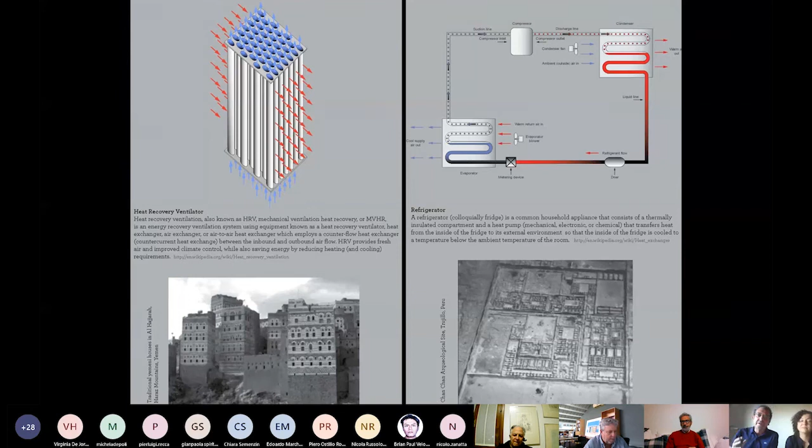Somehow, with modernism, we have lost the knowledge, the talent to understand how architecture can behave thermodynamically, and it has become a kind of plastic or figurative art, while it has always been rooted in very serious thermal considerations. Every single traditional housing, let's say in Sevilla or Naples or Boston or wherever, is based in thermodynamic principles and how to manage the climate resources with more efficiency and the simplest materials. So this idea of thinking architecture, not only, but also thermal hygiene, is quite important for us.

This is something we began to explore, and this will be the first project that we will present. It's very much about relating architecture with landscapes, with different landscapes. Landscapes not understood exclusively as a kind of painting, as a figurative thing, but something that gives you information about the kind of actions that are needed in order to really become efficient. So I will introduce this project, and then we'll give the words to Renata, and we will alternate.

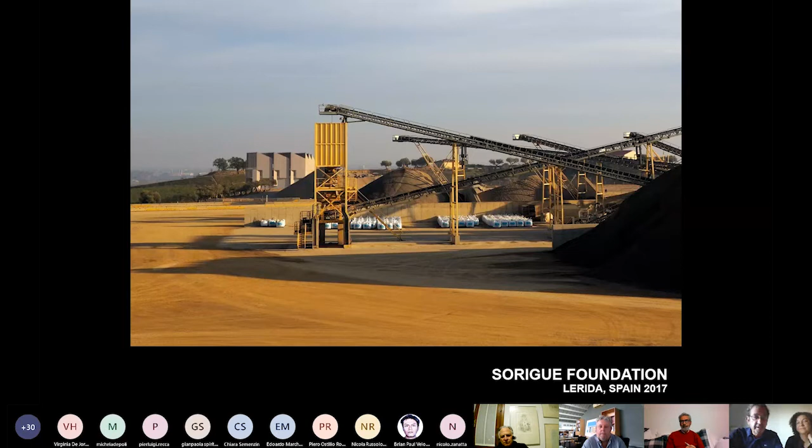I want to begin with this small construction you see below some industrial stuff in a gravel pit in Catalonia. This is the whole area, and the construction is a museum, a gallery of art, a private one, a very sophisticated and very exclusive collection of art. And one of the main things that the client wanted was to root the construction of the museum in the middle of the gravel pit.

For us, it was amazingly important because all the economic benefits that this family had were in debt with the earth, and somehow they wanted us to give a response that really rooted the museum in this place they love, obviously. And the first thing we were trying to understand is why a gravel pit is there in Catalonia.

You have to expand the limits of time, and go to geological times first in order to understand how the tectonic plates were crashing Africa and Europe and creating the Pyrenees, and the river Ebro that is somehow a kind of mark in the whole territory. And how much the ice and water through centuries, millions, 50 million years in fact, have brought all this gravel down to the south, to the flatlands, where the site of this family is placed, the gravel pit is placed.

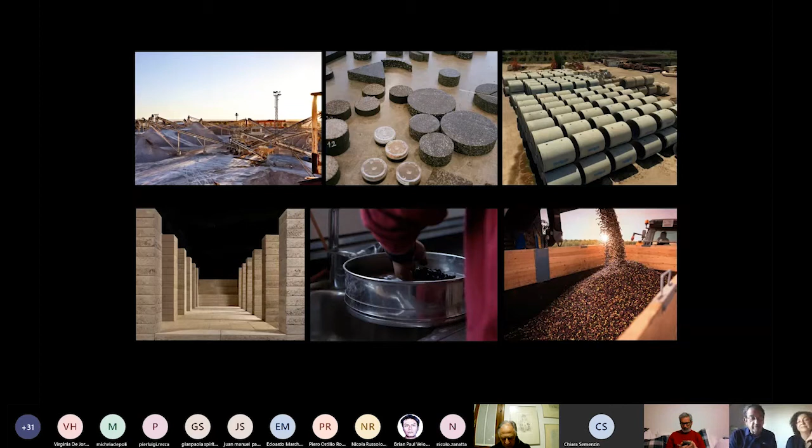This is the olive oil, which is an excellent quality, and in this slide we can see more and more materials. We can see how much they expanded the business to asphalt, to olive oil, to cement factories, etc.

And with the richness they finally gained, they created a wonderful collection of art, very well advised by people like Todolí, who was the director of the Herzog and de Meuron Museum in London.

He recommended them to focus on two topics: the human body and matter. And you can see Antonio Lopez, William Kentridge, Juan Muñoz, who was a friend and colleague of ours, etc.

Once you see the collection they have, we were really moved by the fact that matter and human lives are the two things that we deal with as architects. So somehow we felt close to this collection and all the history of the place, the geological times, the historic times, etc.

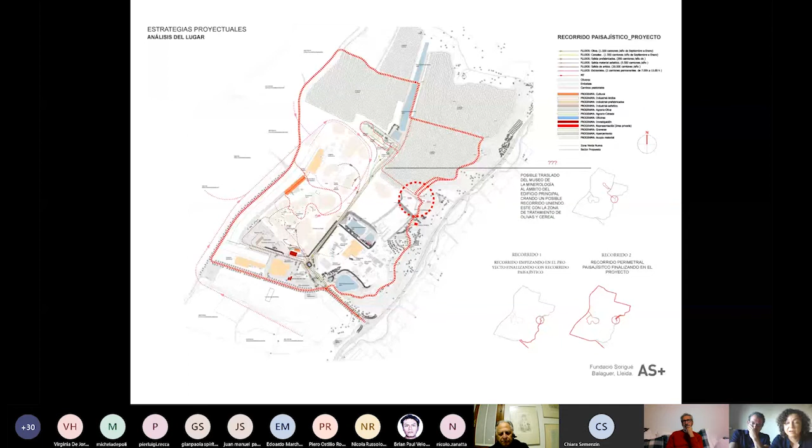To study the site, we draw it with all the needed elements that help us understand the place. The red line marks how we defined the movement of the public, the movement that can give visibility to all these productive processes that Iñaki mentioned before, placed on the gravel. The building of the collection will be one point on this line.

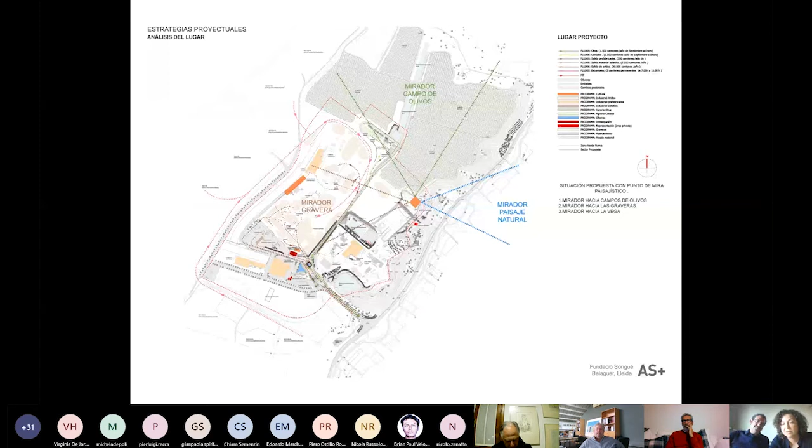This orange rectangle to the right is where we chose a site, a privileged place that gives visibility in different directions to different landscapes: the gravel landscape, the olive oil and olive trees landscape, and also the agricultural landscape of the surrounding territory.

This place has a complicated topography because not long ago part of the earth fell down. So we thought we could use the construction of the building to organize this topographic landscape, but at the same time to get an approach to different places in different directions, as I commented before.

These are the three corners that point in different places: the outside territory of agriculture, the processes inside the gravel pit, and also the agriculture of olive trees. But I would like to go back to explain how we took the decision on the form of the building.

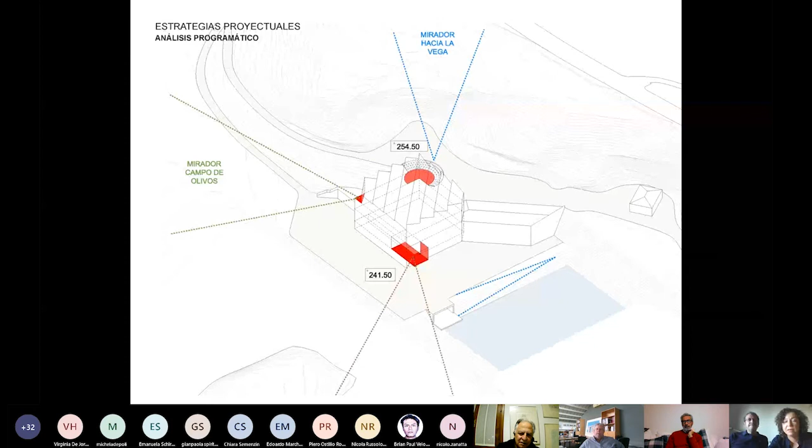When we talk about the building for a collection of art, with a client which is very precise, needing precise conditions as art does, but also for human beings, the other client, we are looking for kind of stability. So the first decision is that the building should be very compact.

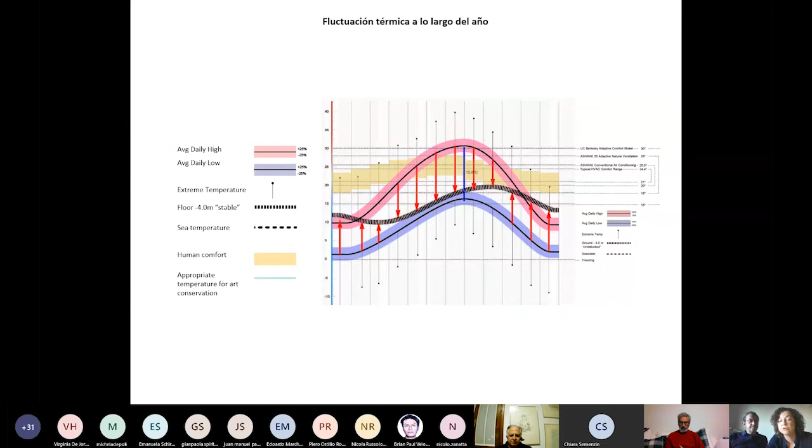We need the form, the volume, that has a minimum exchange with the exterior climate to maintain temperature stability. On this scheme, also important is the black line that defines the temperature of the ground, 4 meters below the level, but it's much more stable. So a compact volume and relation with the ground was the first conclusion that gave beginning to the project.

And these are the first sketches. You see, it's just a cube, which is anchored into the hill.

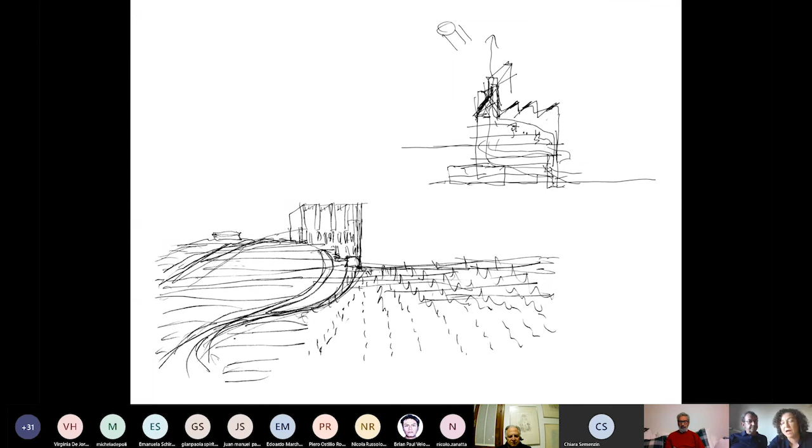The second step, what we start to work with, is natural light. We know that for the collection we want natural light, but we cannot have direct radiation of the sun. So we make this deformation of the roof to close off from the sun and open to the north. To get maximum light, we also turn this square 45 degrees.

And we take this deformation from the roof to the facades, so the whole building naturally opens to the north to capture natural light and protect from sun radiation. This is the volume that was defined through these decisions I mentioned before.

At this moment, we start to work with our collaborators, the engineers, who could give us more precise data about how the building is working with the climate. What was another decision to take?

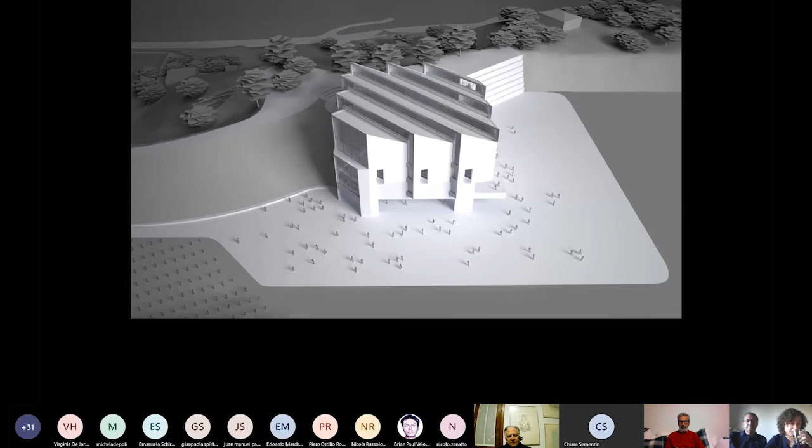It's explained in this scheme. So to get the stability of the building, we need a thermal mass, but not so much on the facade. We need this thermal mass that can give stability to the building, but much more like an inner skeleton of the building. So what you see here is a decision that everything is constructed through concrete - the slabs, the walls - it's a continuous element that maintains the stability of temperature through the year.

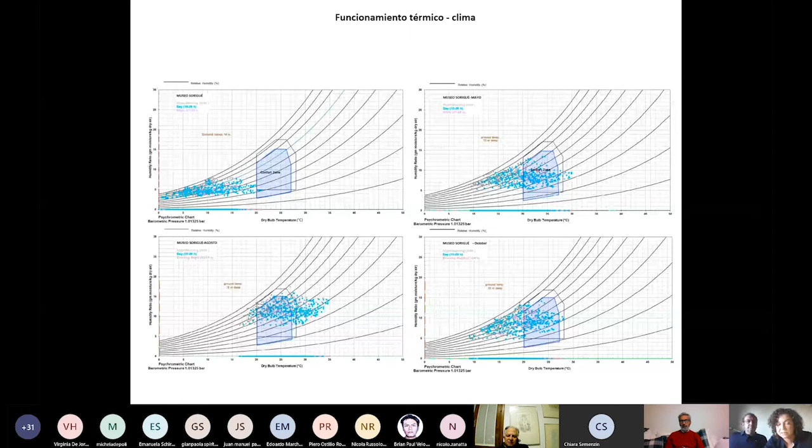This is the next step. This is a climate which is a result of our first architectural decision. So just through the form and through the materiality, through the matter of thermal mass, we get stability. You see that the points start to get more near, which means the climate is more stable. And in spring and autumn we are inside human comfort. We still have some problem in winter and summer.

So we need to add some decisions to condition this thermal mass. So we defined that all of this concrete will be perforated. We create a kind of porosity, and through this porosity, we push the air.

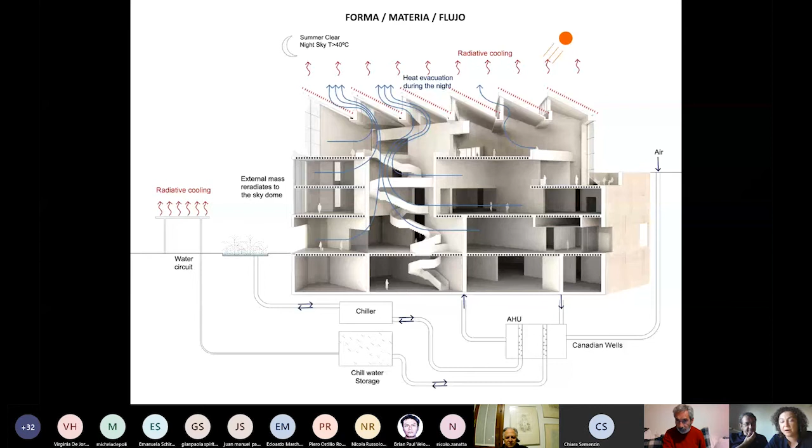So the air is taken from the outside, it goes to the underground, taking the temperature of around 14 degrees of the underground - not exactly 14, but in summer it gets below exterior temperature, and in winter it gets hotter or cooler, giving a more comfortable temperature, and the air gets to these porosities.

And through just this decision, we get comfort in summer, because we can get to 17 to 20 degrees, which is inside human comfort. In winter it's more complicated because the temperature of the underground is 14 degrees, so we cannot go higher. But at this moment we could say that just with the form, the matter, and the movement of the air, this building can work for the art.

The client, which is an art collection, and also for the humans along the tour. And maybe in winter you need to wear a light coat or jersey, just because you will be around 15 degrees.

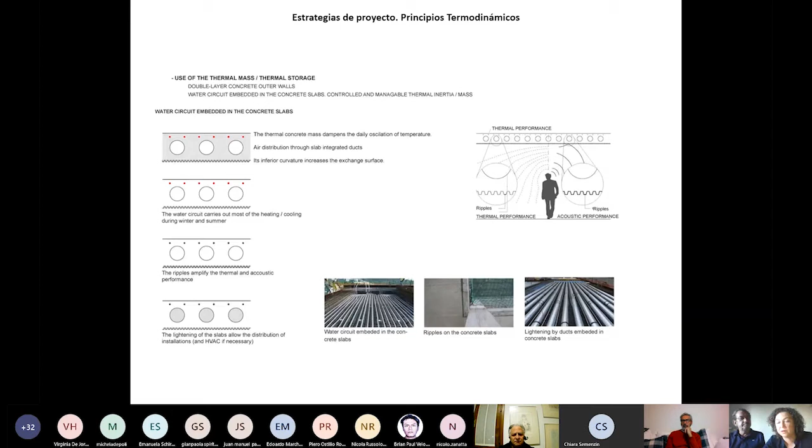If we would like to go to perfect comfort, we can add another porosity inside the concrete, which is water, this time as a radiant floor to heat the human body. And this is how this construction would work.

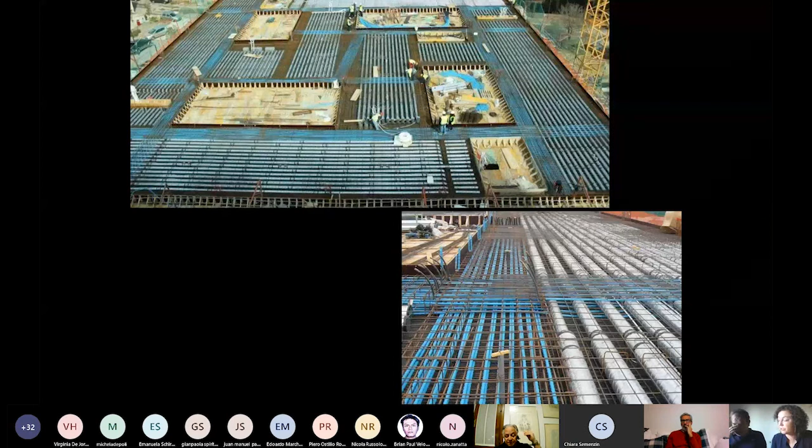It's a lot of tubes in different directions, but it's complicated to make. But once we put the concrete, the building is finished, let's say. It's one material building - we don't have any finishings, concrete floor, walls, and ceiling.

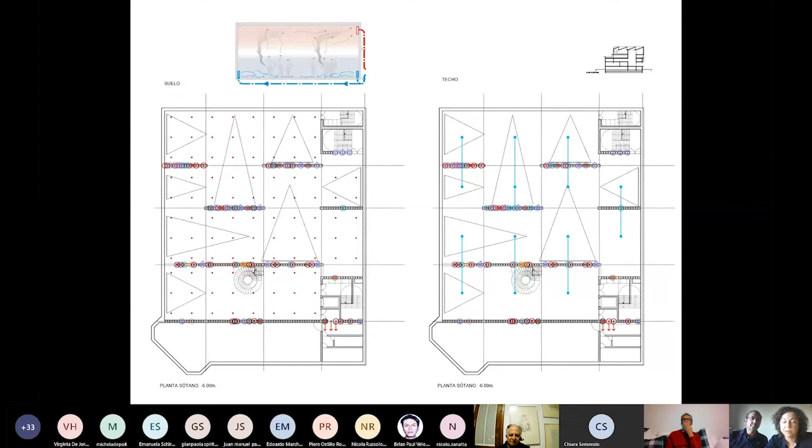Sections and floor plans - you see that this porosity in the slabs repeats in the walls. The building is very simple, it's just concrete construction. I will not get deeper, but you could see how different walls are conditioned, perforated, conditioned on the interior.

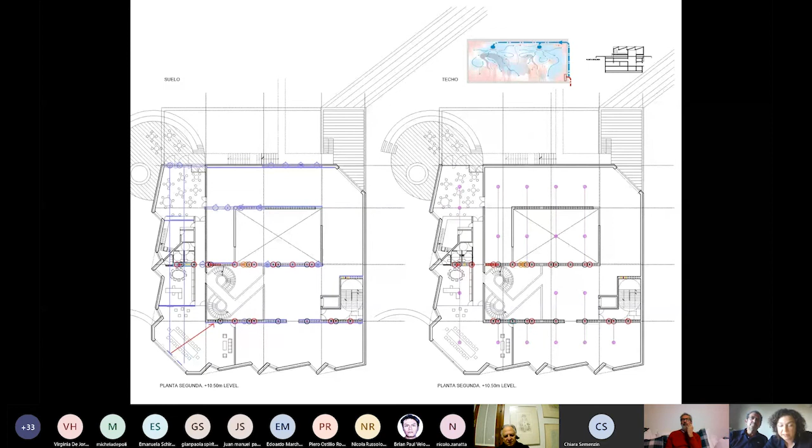Now getting to the last floor, it's different. It's for events, it's when more public could appear, and when this added ventilation in the roof can help to condition the temperature, the interior balance. And each of these floors, each of these exhibitions, is completed with observatories, lookout points that become part of the tour for the art collection.

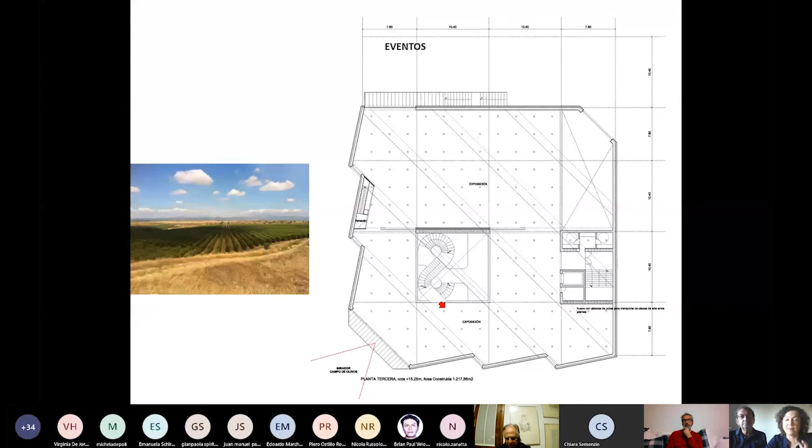So on the events floor, the last floor, there's a viewpoint open to the north with an olive tree landscape and this big opening. We have the view to the west, to the agricultural landscape of the surrounding territory, and the viewpoint or observatory of the gravel.

On the entrance floor, a ground floor with temporal exhibitions, auditorium, and the underground. This is the box completely protected below the earth, for video arts.

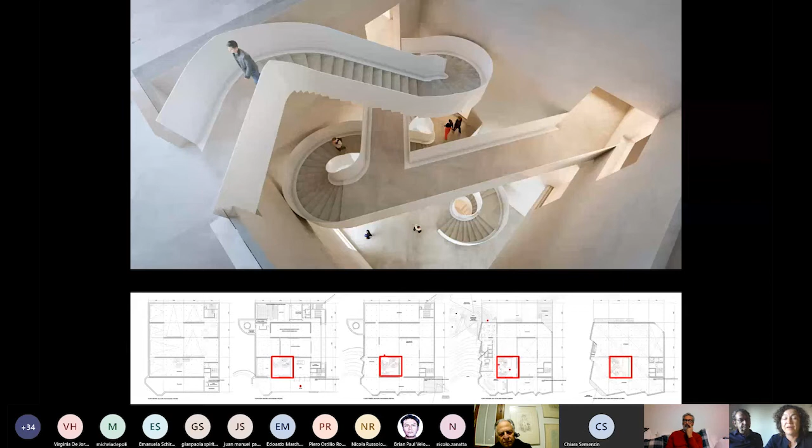And all these floors you see, in the sequence down the image, are crossed through the void, a vertical void, that organizes the flow of people, the movement and connection between different floors, but also the flow of air. So this void is for buoyancy, taking all the hot air up to the roof, and during the night you open the windows and ventilate it, restarting for the next day.

And to finish, this last image is for us somehow the image that is out of time, that can be understood as a thermal machine. It's at the same time a museum, at the same time an observatory, and it's embedded, forming part of the landscape, like the concrete. It's produced on site, with the color of the air or earth or the ground surrounding it.

As to Iñaki, if you want to add something. No, we like it. We like this project.

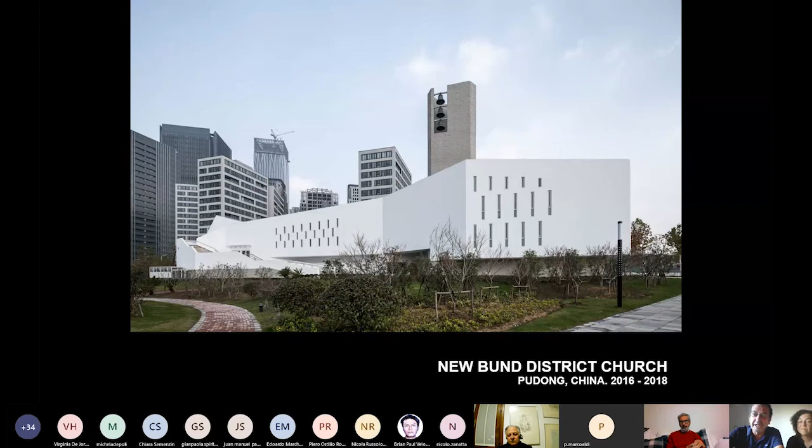This thin form of the church is forced by the fact that there's an underground, a serpentine that runs around, and you can see it almost touching the longest side of the church. It forced us to use just this very small corner of a park that had a river and finally a lake, a small river connected to the Huangpu River, a huge, wonderful, beautiful river that crisscrosses Shanghai.

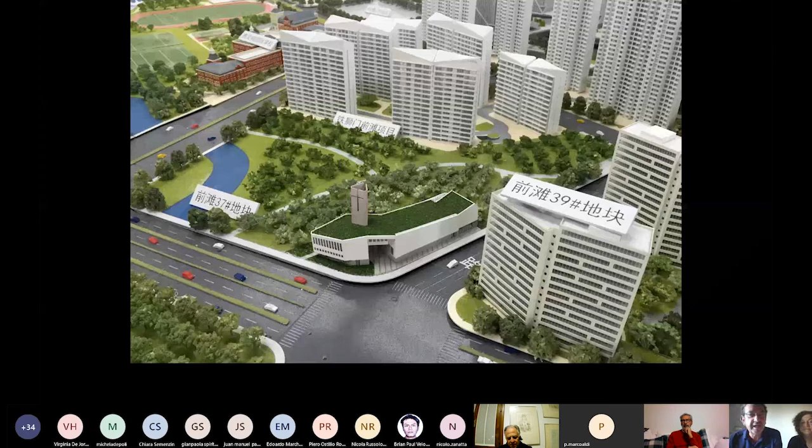And here you see what was finally made. The small spring, the small river, was transformed into a lake, much more interesting and beautiful. And we occupy the corner of one of the main entrances to the neighborhood.

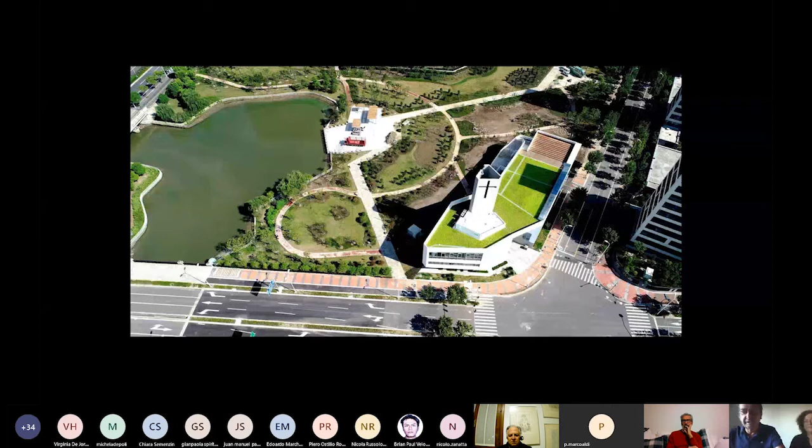Somehow they decided this was an interesting site, because everyone coming to decide if they were going to stay with their businesses in Shanghai would see there's a Protestant or Catholic church—finally it's ecumenic, welcoming everyone. So this is the reality built.

One of the things we did was change and manipulate the original design, which was really ugly, I have to say, and we divided it into two buildings: the bureaucratic, administrative part, and the religious part.

We decided that somehow we had to maintain the scheme, but create an entrance to the park and to the church at the same time, as you can see in this image and in the plan. And we began to think about the kind of church it should be, because it had to be ecumenic.

So we wanted to make it longitudinal, as in the tradition of Catholic churches, but at the same time we had to deal with other kinds of Protestant and many other Christian churches that sing and interact with the auditorium in a more theatrical way, with everyone singing. So it had to be a kind of interface between the traditional longitudinal one-room layout and something more articulated, pivoting around the director of the whole scenography.

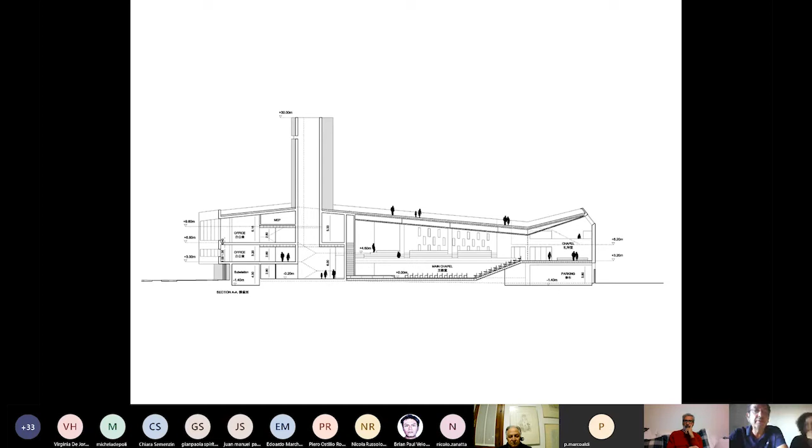And then the roof, which was key for us, connects the church to the park, to really make this church part of the public space. And the tower is just a ventilation tower, it's just a void.

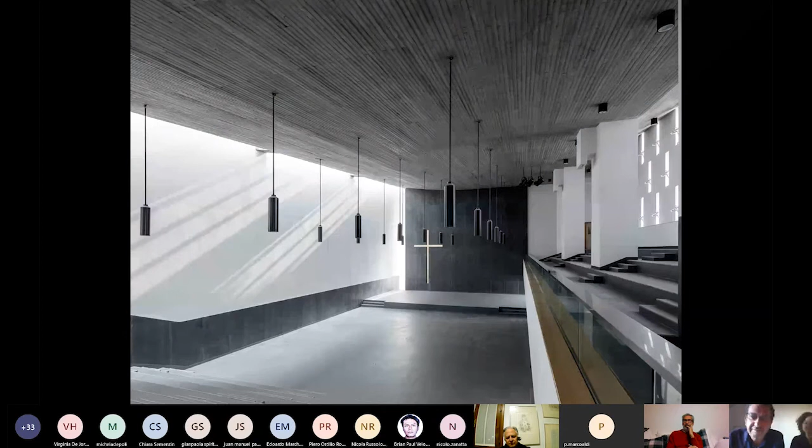And here you see what I was trying to explain first: the fact that it's like half of an auditorium, but it's also longitudinal. And the whole roof is the best concrete made at work, so it's very well finished, to be honest - it doesn't need too much explanation.

So these are the elements we can control, and the rest is out of our control. In fact, the church is still not in use because the neighbors have not arrived yet. So the whole neighborhood will be put at work at once, and the preacher will come at the same time as the new neighbors. Well, so the furniture is still waiting for the neighbors.

And the cross couldn't be any other palette than red, which is like the Red Cross and it's strange, or golden. So we decided to go for golden. They have this kind of strange specifications.

So here to the west, we have all the ventilation - it performs through the lighting systems. Now you see to the east, the sun comes like this; to the west it comes horizontal. There's a kind of ritualistic use of light that I don't want to go too deep into, but coming from Catholic countries, we know a little bit about all these things, and it's not difficult to manage them as an interesting resource for architectural control.

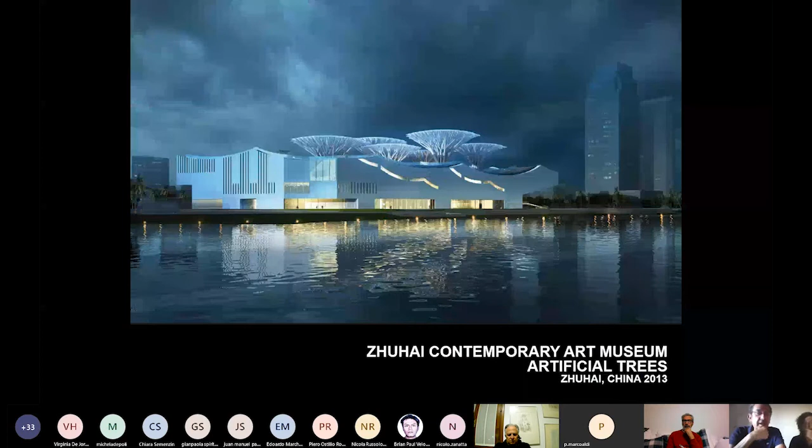This one is quite connected, I have to say, with the third one, and this is why instead of three cases we want to bring four, because this one is again in China, in the south, in Zhuhai, very close to Macau, on the sea front. It has again terraces and wide surfaces, and many of the patterns we were unconsciously using in both moments without realizing how closely they could be related, with the stairs coming up, etc. But I give the word to Renata for this.

And from this point is where the bridge is coming. Probably you heard in the news a couple of years ago, I think it's the biggest, the longest bridge in the world, 60 kilometers long, that connects Hong Kong, China, Zhuhai, and Macau, these three countries, we could say. So the site is amazing.

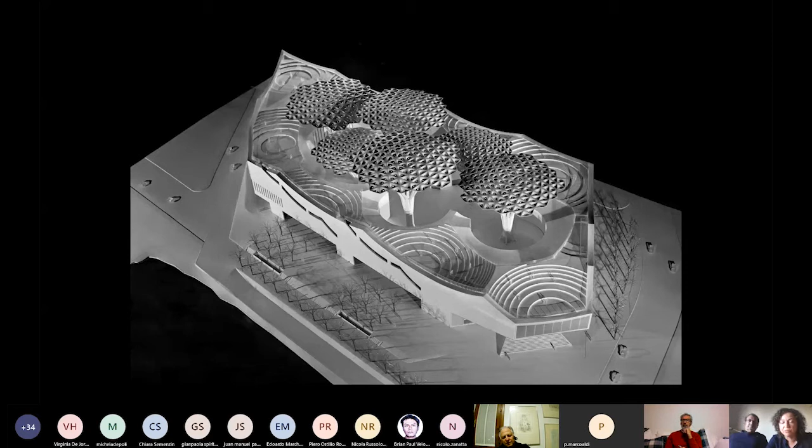As Iñaki commented, I want to focus on the iconic elements, the most important elements of the project, which are much more the exterior spaces than the building itself. Knowing this site from the beginning, we thought it shouldn't be a museum that is completely closed, a white box, but one that can get out, that can have these public spaces. This museum can be an observatory of these incredible surroundings and different landscapes.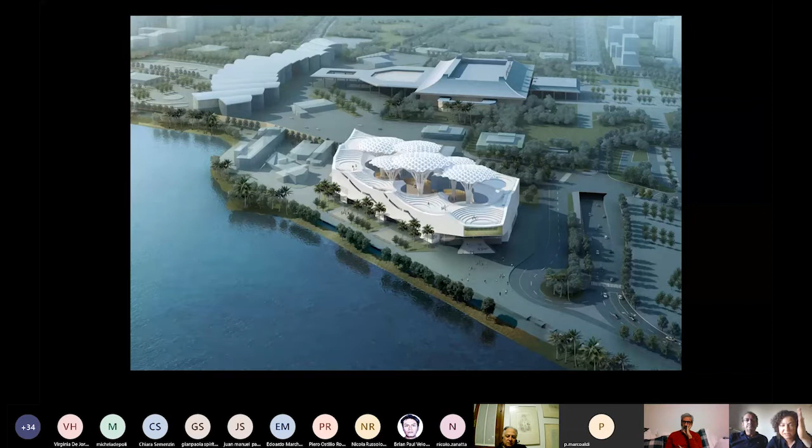At the beginning we thought this would be much more of a problem, but lately we decided, okay, once we have this concrete mass, why not take it up over the floor, continuing the structure and continuing the concrete. So from this moment the project starts much more like cutting from the existing volume.

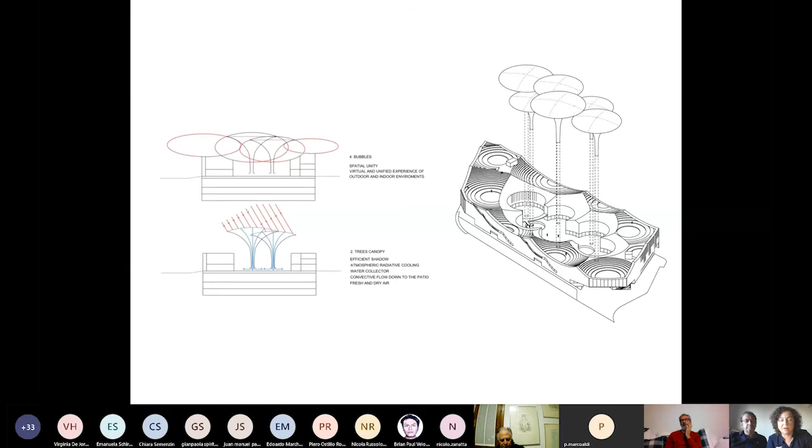Here you see these first ideas, how the canopy creates these kinds of bubbles that create the units, the spaces that unify the form of a tree, of a canopy, and the form of the amphitheater. That's visible in this sketch.

When we start to think about these canopies, we find this example of a tree, the prehistoric dragon tree, which is very different from other trees because it doesn't drink water from underground through the roots, but takes water through the dew, through the air, through the humidity in the air, from the top of the canopy.

This humidity is distributed through the branches of the tree, so it has a very precise geometry because of this. It works like a kind of machine for the exchange of water.

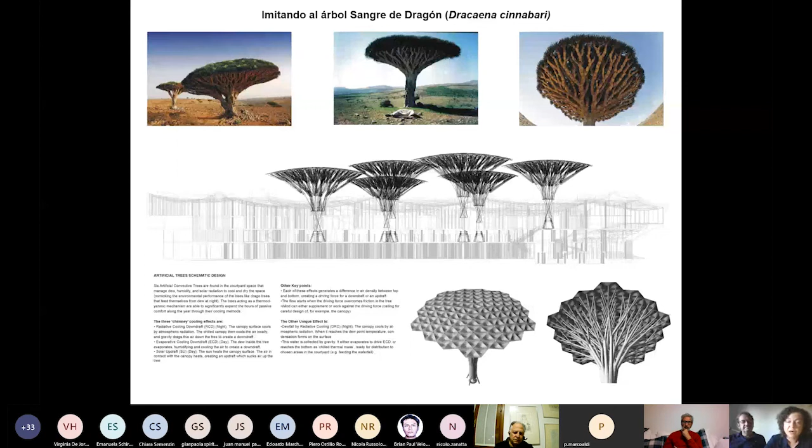When we define this tree, we think: if we protect from the water we can collect it, and if we protect from sun radiation with this sophisticated collection of voids, maybe we can work not only with the movement of water but also the flow of air. At this moment we start to work with Salmaan Craig to define this possibility.

Here you have a description of how this machine would work. This is a cycle of 24 hours, with air going down and air going up, closing the circle in 24 hours.

How it works: in the morning, in the upper part of the canopy the air is colder, but with the first sun, the dew in the air starts to transform into water. The humidity in the air changes state to water. This needs energy, so the air gets colder.

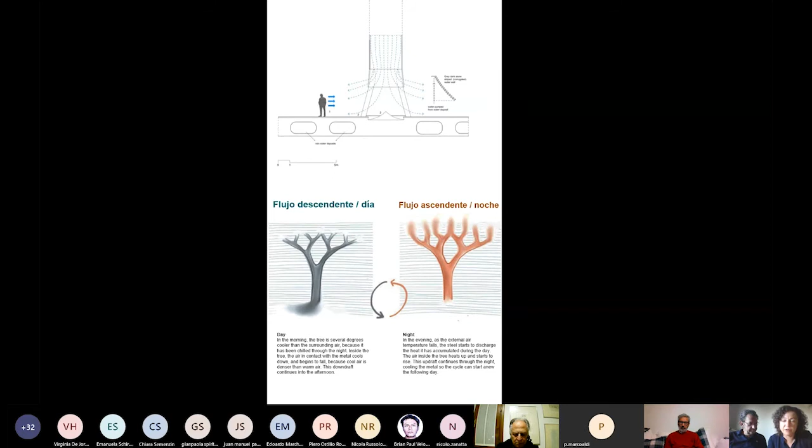This cold air goes down through all these tubes, down to the courtyard. Throughout the morning the cold air goes down, but during the day the mass of the trees gets hotter and hotter. In the afternoon there's a moment when the flow changes: the cold air stops going down, and the hot air from the courtyard goes up instead. So these trees are a kind of heat exchanger.

So the form, as I explained, is very sophisticated—we need the flow of the air. It's all precisely defined, from one branch to 180 branches in the upper part, always with the same surface in each section to make this flow smooth.

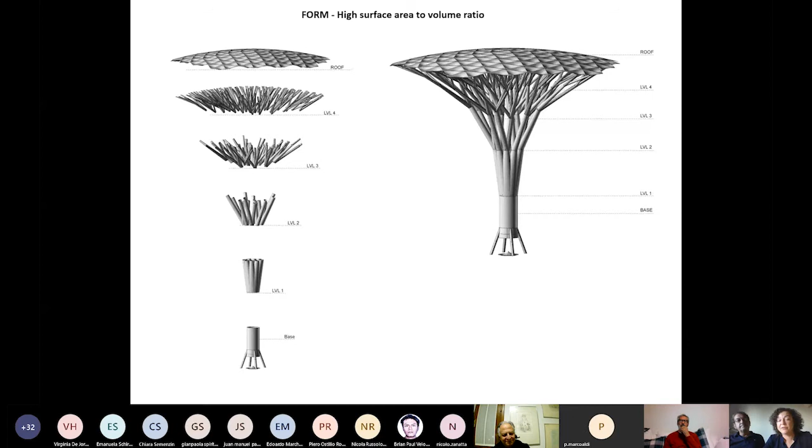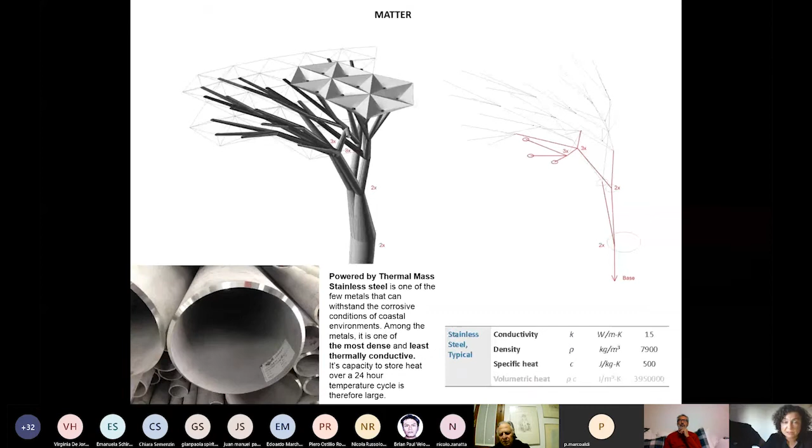It's a kind of thermal machine because it has a very high surface-area-to-volume ratio, so it works like a thermal exchanger machine. For the material, we designed it in stainless steel, which has the best characteristics as thermal mass, and it also reflects the sun.

And these are kind of the geometry—how the tree is constructed through 5 pieces.

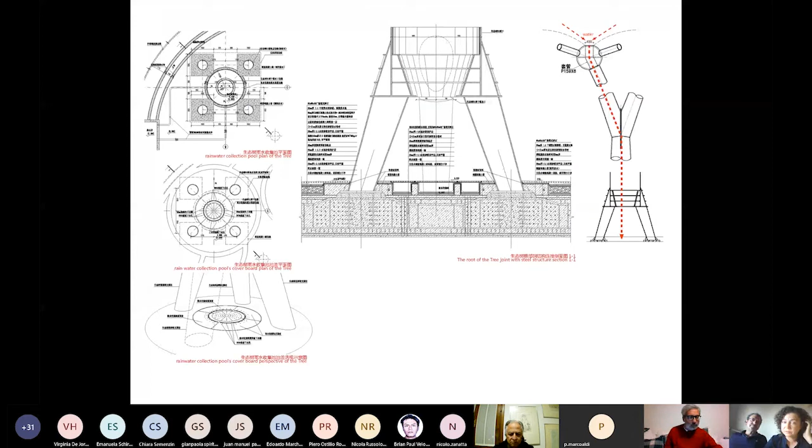All this canopy is collecting the water, but it's going down to the deposit underground. These are construction drawings already. Here you can see the section of the building, the inner space with 6 dragon trees, the canopies, and the exhibition ring that is surrounding this place.

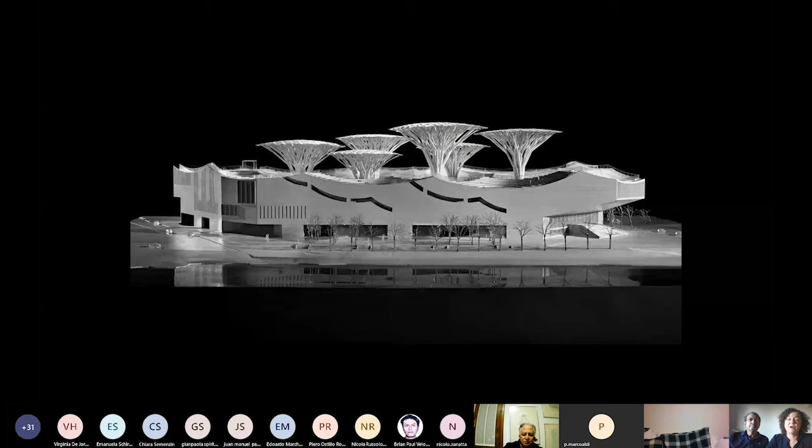And bringing back the idea of the observatory, the roof space with the amphitheater, the courtyard with canopies, and the last image, which is a facade of the museum. These trees give the iconic character, and this is the first image you see when you come through the bridge from Hong Kong.

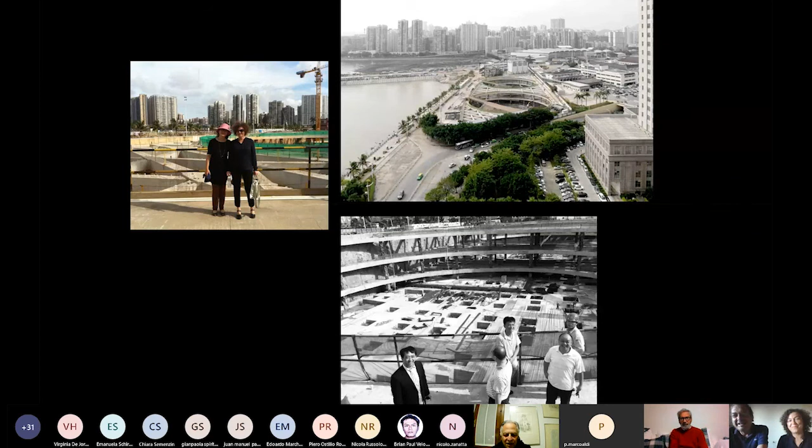Here is Renata with one of the leaders of the construction company at the construction site. We are waiting for the second step now. The last one is finished.

This is an intermodal station and a park in Logroño, in La Rioja, the place where one of the best wines of Spain is produced. La Rioja is well known all over the world. This was the product of an international competition we won, and it has taken us 16 years to finish. It's a slow process, you have to be patient and deal with many different facts.

Five mayors of Logroño, the city where the intermodal station is located. It's a small city, 180,000 people. The river Ebro, the biggest river in Spain, very important—it's the same river you saw in the first slides when we were showing the gravel pit. And the city was cut in the south by this huge train station for passengers, for goods, local trains, national trains. It was a barrier that socially changed the city completely from north to south, so it had a lot of problems.

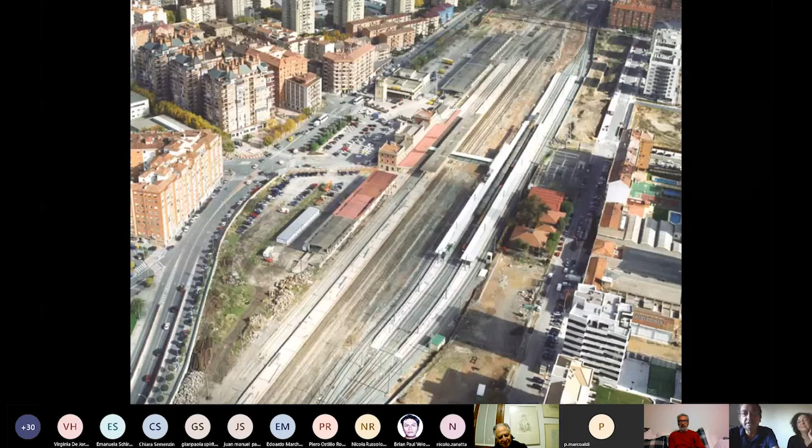Once it became sunken into the ground, the whole thing was transformed by us into this. This is the first part, the train station. We have finished also the bus station, I will explain it now. And what was previously a kind of barrier has become a place that unifies north and south and creates a center, a new center in the south.

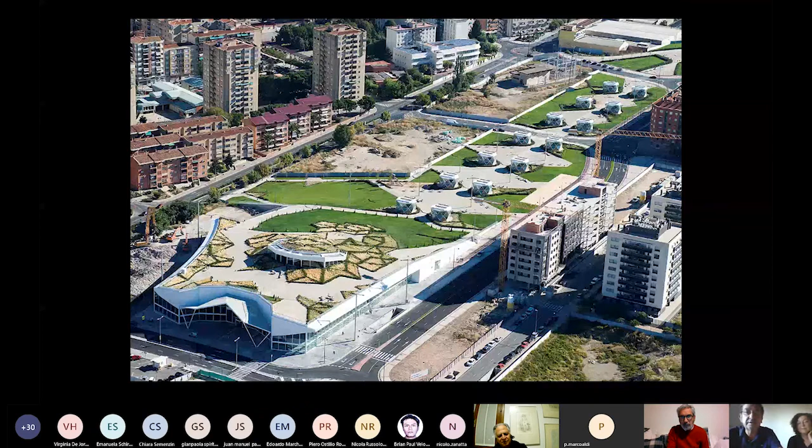What was a kind of wall separating north and south has become a ring of green spaces that reconnect the whole city and give a lot of new spaces for bikes, joggers, etc. So the whole idea of the project is based on this. It's social, but it's also landscape, and at the same time it's infrastructural.

I think it was needed to show this project because it completes quite well our approach to entropic or productive landscapes. Logroño is in a key point touristically, in a key point of high-speed trains, very close to the Basque Country, to Bilbao, to Catalunya, Barcelona, to Madrid—1 hour and a bit more from Barcelona by high-speed train. So for weekends it's a wonderful plan, and it's a beautiful region. The whole idea, La Rioja, is incredibly nice.

But this is the model that we presented to the competition. And the reason why we won it—as you can see, there is no train station, no iconic shape for any kind, it's just a slope. It's a smooth slope in continuity with the green corridor, and some towers and some slabs that reconnect the whole void with the north-south areas already constructed.

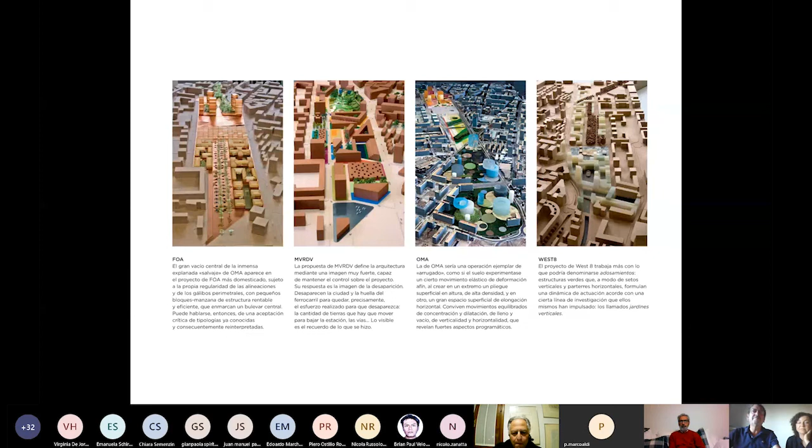We were fighting against Rotterdam, as we always say, because it was Foreign Office, when Alejandro was the director of the Berlage Institute, MVRDV, OMA, and West 8. So it was the whole pack of Rotterdam's best architects fighting against us. But if you see their models and compare them with ours, theirs are full of, let's say, 19th century blocks or things like that—it's a kind of mess—and ours is about public space, about landscape, about connecting the idea of movement with the idea of not only trains, but also human bodies.

This is another view of ours, and these are the 3 boards—the 3 boards of the competition. I always bring them to show why we won this. First, the first one was a study of the changes at the urban scale.

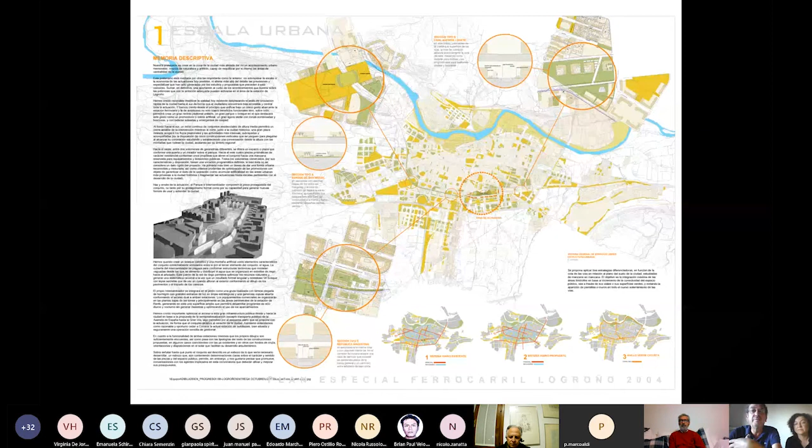It's a small city, but it has a lot of potential, and it's growing now—even now, it's growing, which is almost a miracle. Once you could identify the key points where the connectivity could be reshaped, the whole idea of making a park or creating a kind of green belt captured the imagination of the people of the city, and it was amazingly attractive.

This is the main drawing of the stations. You don't see any station, you just see green stuff—just some turrets and green parks. And this is, I mean, this is the main reason why we won.

We were selecting the idea of a green surface, you see water ponds, just because of the river Ebro so close to the city. The whole city is one of the few, if not the only one in Spain, that has a lot of subterranean channels of water. The drainage surface of the whole city allows you to work with green stuff very easily.

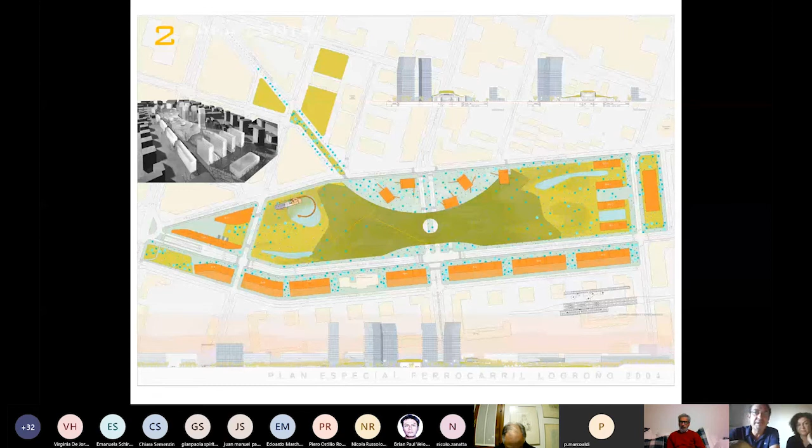It's one of the few cities that stays completely green along all the seasons of the year in Spain. So we said we can really do something that is easy to maintain and productive in terms of reactivation of the whole sector.

Here you see the U shape of the bus station to the right, the train station to the left, and the small towers, 60 meters or so, looking at the topography and the flatness of the city.

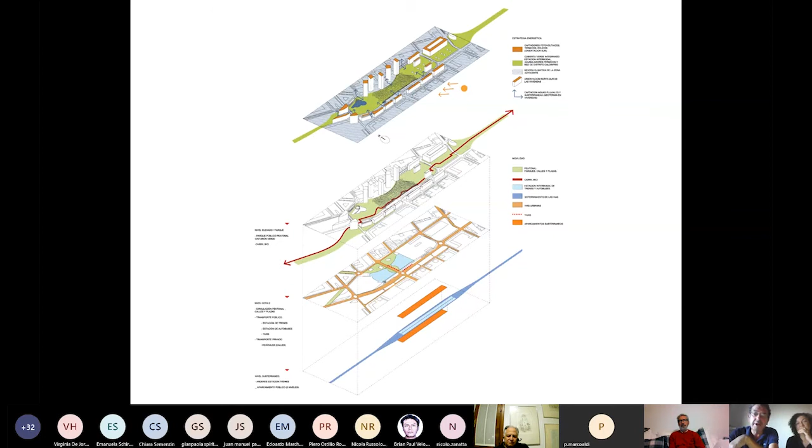This is a scheme that explains the many layers that we had to deal with—many infrastructural layers, parking layers, let's say a subterranean car park, etc.

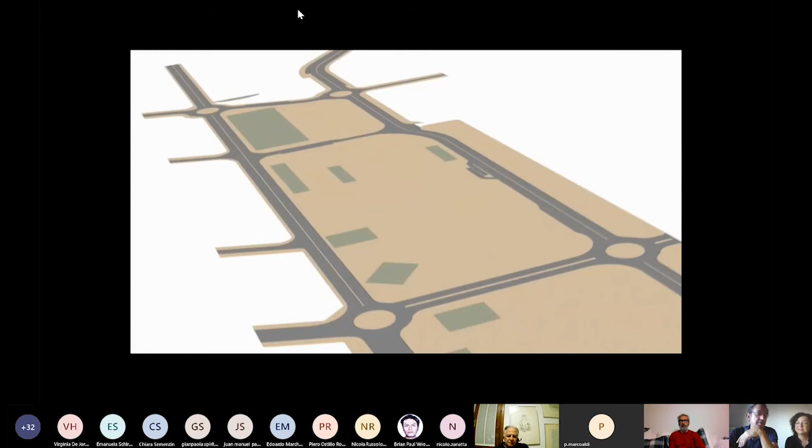I don't think we're interested in this one because it's very slow—it's the steps, how to build this. It was about how to build this step by step without disconnecting one part of the city from the other. It's more about engineering the process of construction.

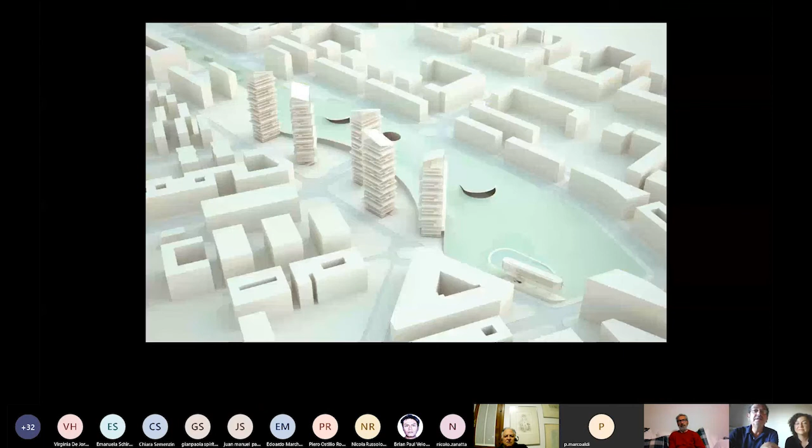This is the final image of the park and the five towers, the final image of the towers, and the transformation of the drawing for the competition into a drawing inside the city. These are the images of both stations and the five towers.

The towers are terraced and also very green looking, like balconies that are rotating and have photovoltaic solar collectors that capture energy for the maintenance and lighting of the park at night, and also for hot water for the residents.

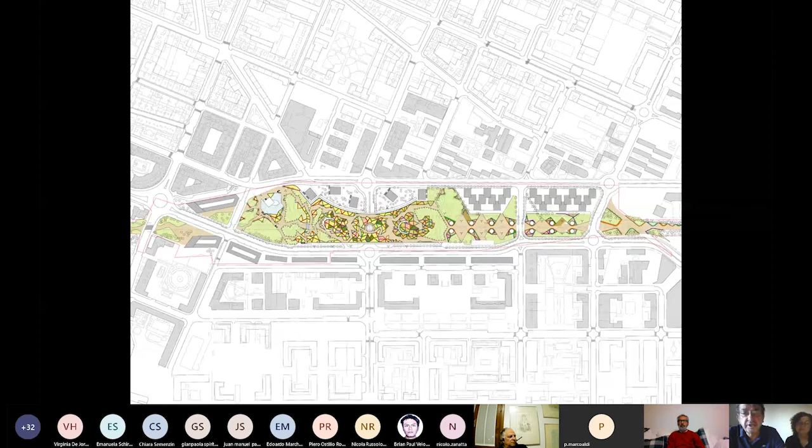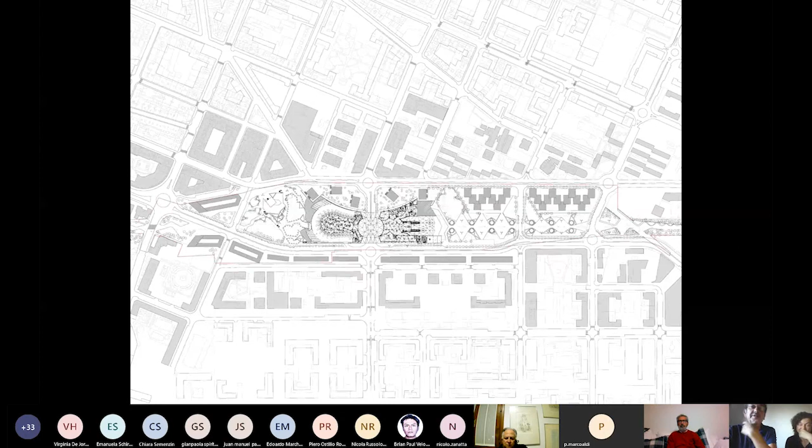Here you can begin to see how much the patterns become more triangular, and how in the final decision, because of some technical issues, we changed it—to the left is the bus station, to the right is the train station. That's the only change, and these are the final real sections of the whole thing.

So the triangular shape comes from the fact that we needed to construct within a low budget. I have to say that a very famous Pritzker Prize architect had the exact same commission for another city in Spain, the city where the president of the government was born in those days.

It couldn't be made because when they tested the schematic design, it was 10 times more expensive than their budget. Ours, including the park, was almost within budget. So this was an important difference.

The triangular shape allowed us, instead of going to a huge span like the conventional 19th century station, to go with columns and create this kind of grotto cavern shape instead of a 19th century industrial crystal palace or whatever.

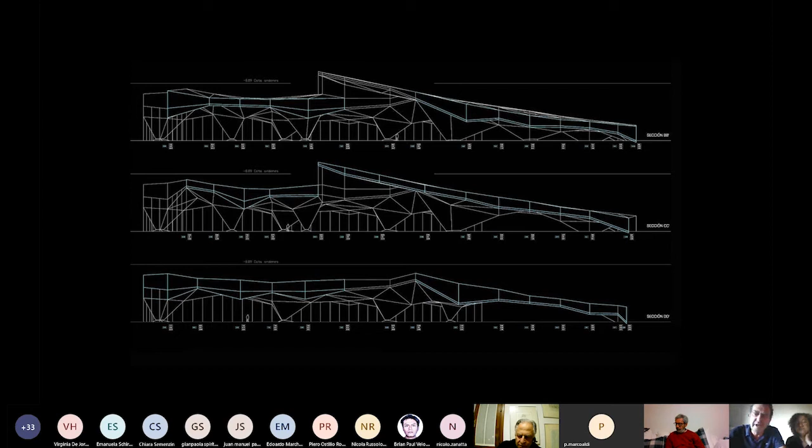These drawings are politically very important because they show the contrast between us as architects and the companies, where the limits for them and us were traced. So from this line out was our field of authority, and inside was their field of authority. It worked quite well along the whole process.

You see the columns—they're trying to solve the complex problems in the basement, which has a lot of stuff. So we went with never more than 20 meters of span, which made it easy to manage.

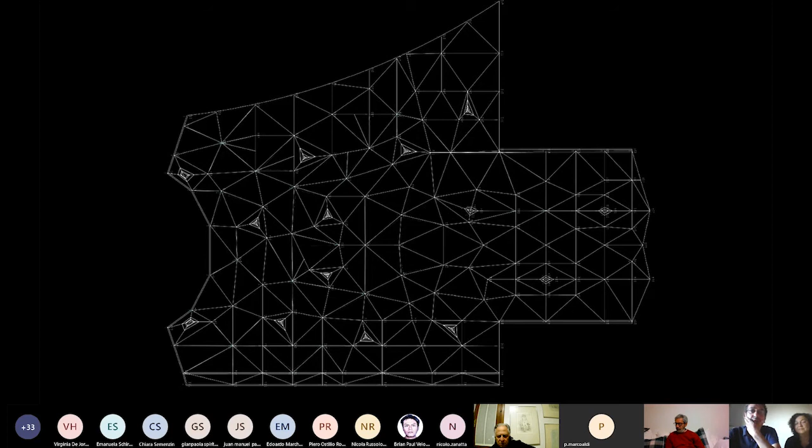You go down to the tracks that are sunken, and you see some skylights. This is the structure. The structure is very simple.

We were not interested in trying to become amazingly interesting in structural terms. What we wanted was to make it simple and create all the effects we wanted without spending lots of money. So you see the column on the left side, and all the surface maintained at this column.

But if you compare all these geometries, the roof is completely regular. It's very simple, the most conventional slab you can have, and it has this kind of shapes just because the materials can adapt their geometry. It's regular, and the forces go from one side to the other, and the whole thing is built.

Up there, the triangular shapes become the parterres of the new park. When you go up to the upper parts of the park, the triangular shapes are transferred from inside to outside. With Teresa Galí, the well-known Spanish Catalan landscaper, we were dealing with this kind of geometrical patterns everywhere.

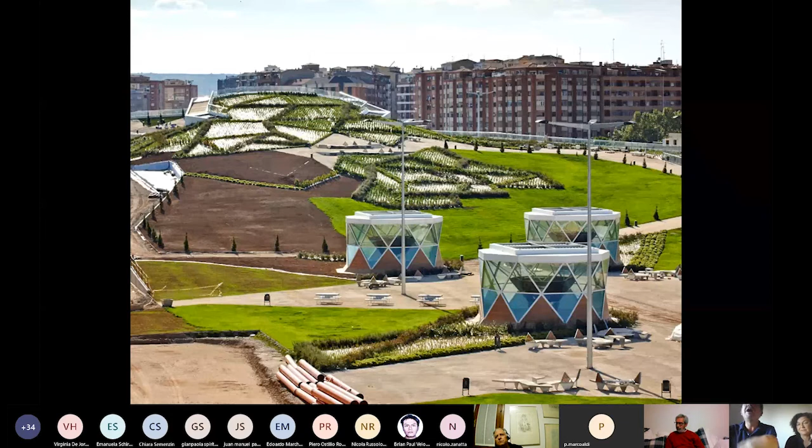Inside, with artificial materials, with extruded aluminum shutters that are commercial products, very simple and efficient, recycled aluminum, and outside this kind of geometries adapted to natural materials. This is the entrance, the station, and this is the upper part.

The upper part has mostly sand with cement and different bushes, etc., and inside you have these skylights that you can see through some of these aluminum shutters.

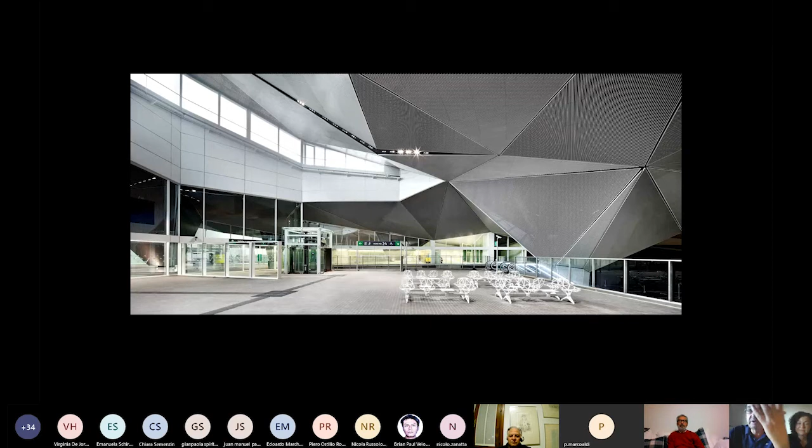While you move in a station, you always move longitudinally, mainly from the door to the train track and vice versa. So all these facets of our triangular shapes, in one moment, become translucent, transparent, and show completely the interior. You will see it later.

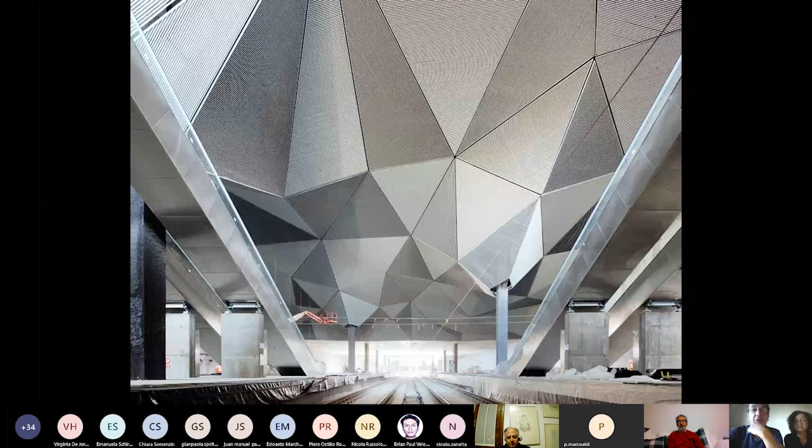This is the way you go down, which is very normal. And then you have the skylights that give light to the park at night, and also during the day to the areas where people wait for the trains.

Up and down, this kind of geometry creates a completely new way to look at the city. A lot of people are visiting, and Instagram is full of portraits of people rediscovering the relationship of the city with its surroundings, the mountains, and the more interesting natural motifs of the surroundings.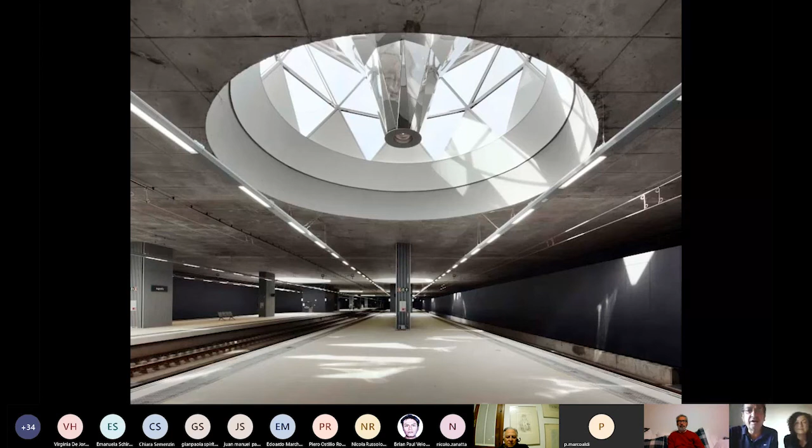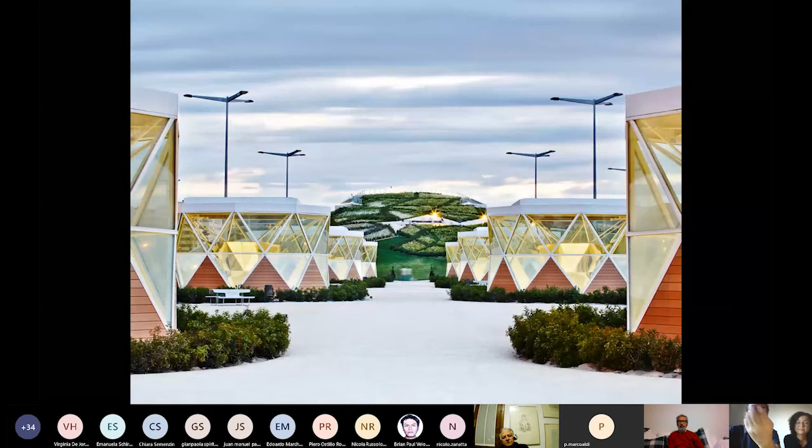The skylights have this kind of kaleidoscopic way of projecting the natural light inside and expanding it, so you can really enjoy an interesting space, and outside it creates a kind of parade of monster skylights.

For us, it was a very key element to really control the budget and at the same time be able to create the effects that we wanted to create.

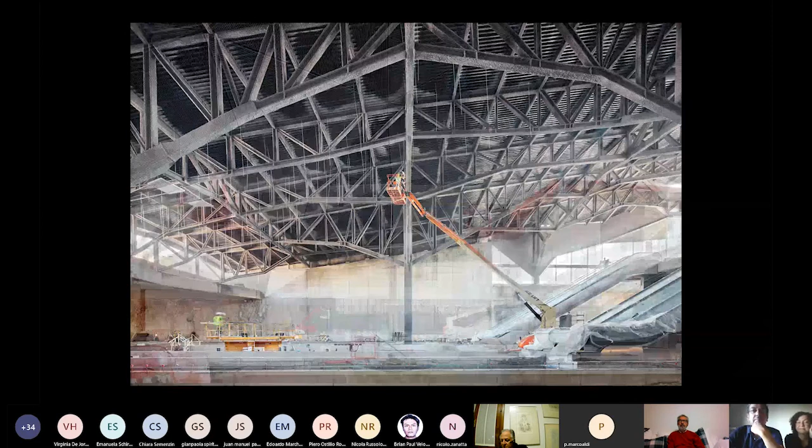Of light, darkness, roughness, monumentality, modernity also. It's the new high-speed train coming to small cities in Spain, a completely new issue for all of us.

And the tracks are almost like the most simple elements, to maintain the quality of the construction, but at the same time some kind of fundamental quality too.

This is quite important because you can see the cranes around and new constructions, and now it's full of new constructions. Even in the crisis that we had the last years in Spain, this was one of the few cities and few places in the city that still had a kind of interesting activity.

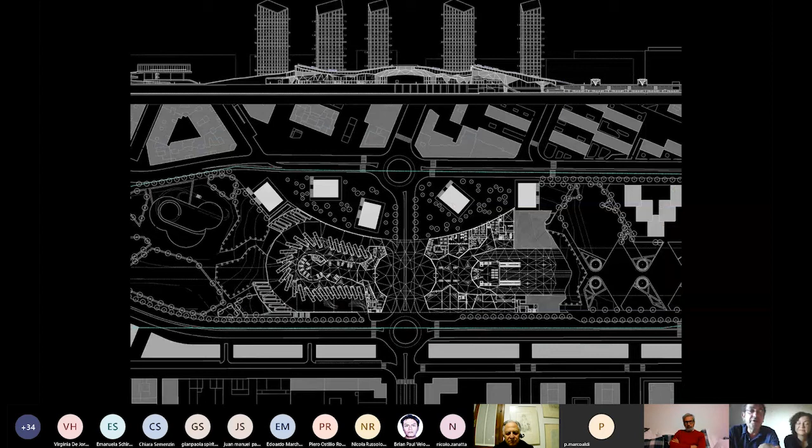And then we continue with the bus station very quickly. I don't want to insist, but you see that the geometries are similar, but at the same time they are adapted to the bus movement.

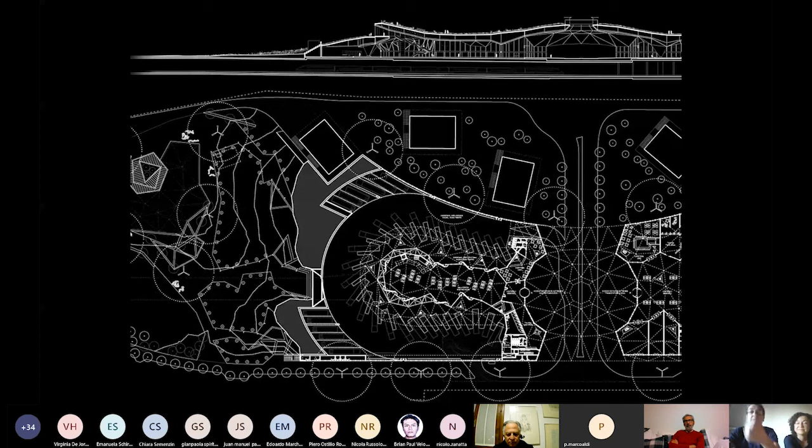While the construction is again very, very simple, the structure has the same principles. And here you see how we are finishing it with the extruded aluminum slats.

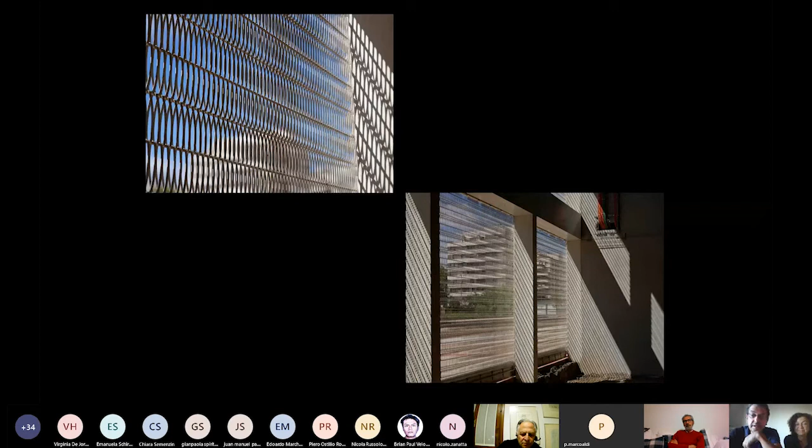And instead of having glass in the facades, we have this kind of stainless steel mesh that maintains the ventilation, but at the same time there is a texture and a protection.

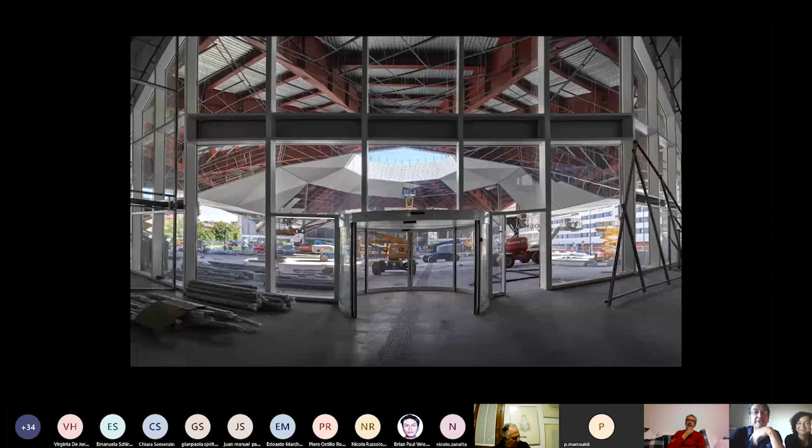And here you have one of the most important places, the gate of the city, the view to the south, the union, the connection among the both stations that has a gigantic dome of 60 meters, that we were always crossing our fingers because we were really scared about not doing it. Finally, they decided to pay for it. I mean, this is the ring that maintains the whole structure up.

The moment of the lifting it, and then the main beams connecting both stations. To the left is the bus station, almost finished, not yet. The lobby, the entrance. The other is completely finished. Not a single glass was broken while the process, which is almost a miracle.

And this is the bus station, which somehow is similar and somehow it's quite different. So the materials are similar, but you can see that the configuration is different, and also the light. While the train station is about sunken constructions, going down and going down into the earth, this one is going up to the park and going up to the sky.

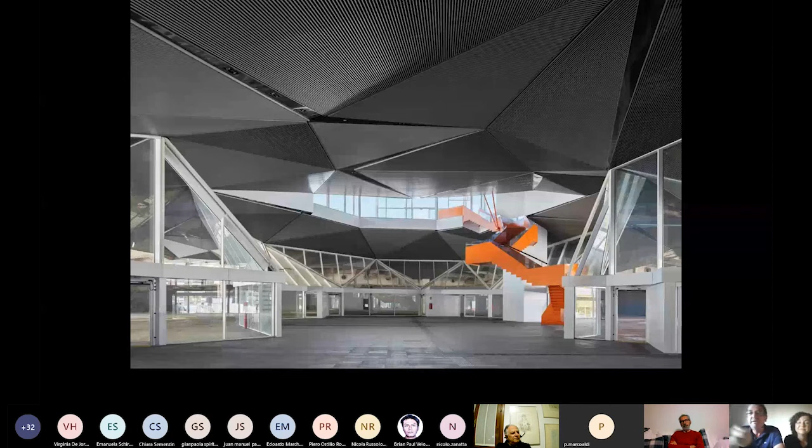These glasses are oriented to the west, so at the end of the day there will still be a ray of sun going into it, and there's this orange stair dramatically pointing out there. It's a huge stair that is just, if you look up to the left, you see the V-shaped cables that maintain it in equilibrium.

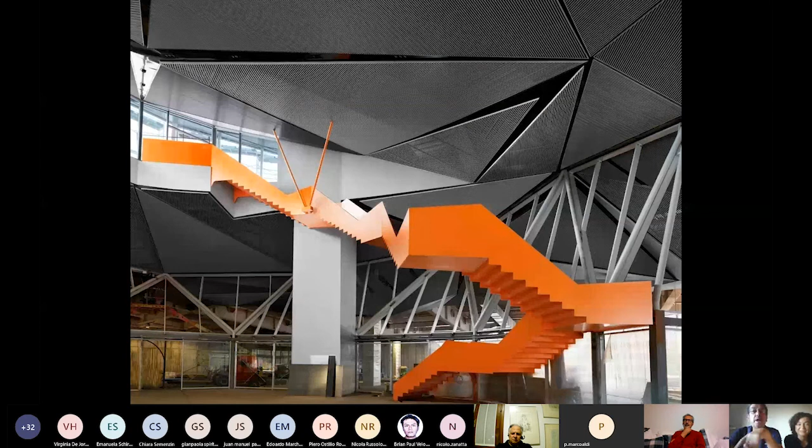Is the whole, here you see it quite well. Everything is in the same steel, and the V-shaped cables are maintaining the whole structure. And the dome that contains and maintains the connection among both.

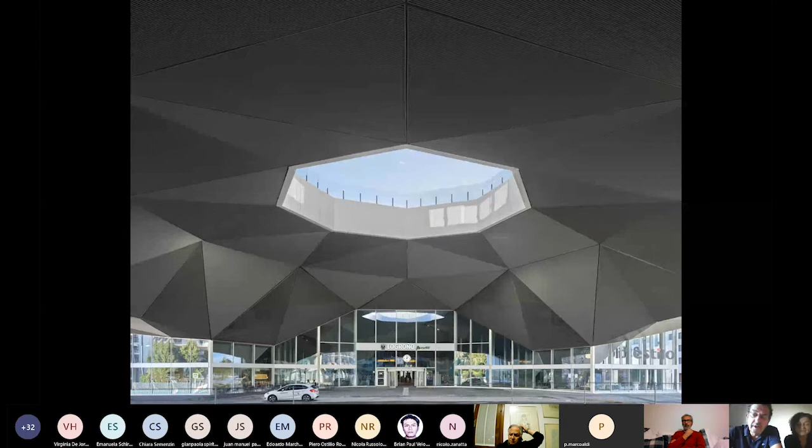So when you go out and you enter into the city, this is a new gate, a new entrance, and this is the other side, the longitudinal and the transversal of this building that is construction infrastructure, but somehow is the biggest building that we have finalized and the one that has taken more efforts.

But at the same time is the one that somehow explains in a better way how we understand the relationship among landscape, public space, social issues, infrastructure, industrial buildings, and somehow also primitive or symbolic shapes as the dome, which is probably the most symbolic and most, let's say, the architectural piece of construction that we have ever made.